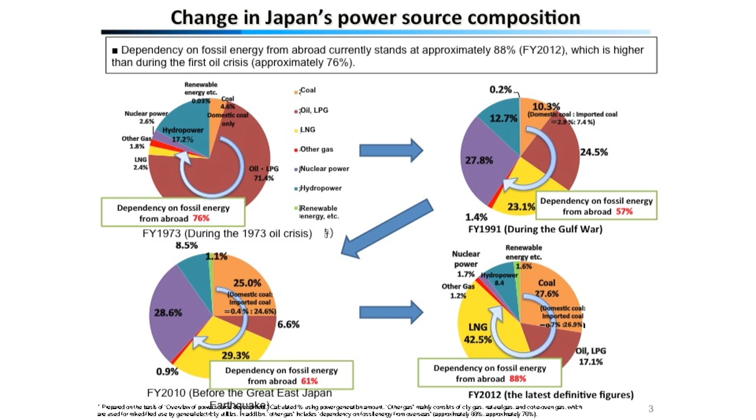We succeeded in reducing the dependency ratio to around 60%. But unfortunately, after the great earthquake, because of the nuclear shutdown, our dependency on overseas fossil fuel for power generation has reached 88%. This number is far worse than the 1973 situation. That's the reality in Japan.

Of course, the self-sufficiency ratio of Japan is very low. Japan's self-sufficiency ratio is the second worst among OECD countries. Do you know which country is worse than Japan's self-sufficiency ratio? Luxembourg. That's the reality.

Japan and other Asian countries are also heavily dependent on Middle East oil. 80% of the oil supplied to Japan's total oil supply has passed in front of the Hormuz Strait, in front of Iran.

Not so many people well understand the procurement structure of natural gas in Japan. The natural gas procurement structure is relatively diversified: Australia, Indonesia, Malaysia, Brunei, Qatar. But still, our dependency on the Middle East for natural gas is around 30%.

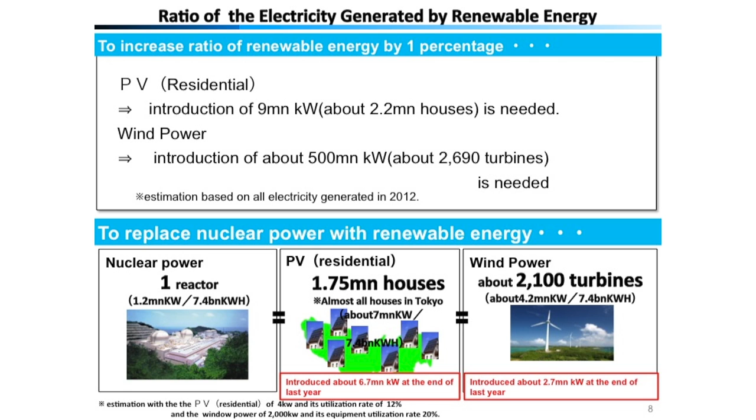To increase the ratio of renewable energy by 1% of total electricity supply in Japan, in the case of wind power, we would have to introduce around 2,700 turbines. That's not realistic if we want to replace nuclear or coal with renewables perfectly. That's a big challenge for us as well. We need renewables, but we have to be realistic.

And next, I would like to share the energy problem from an economic perspective. We had our first trade deficit in 2011 in 3 decades.

Fossil fuel import has rapidly increased. In 2010, fossil fuel import cost was 17.4 trillion yen, but in 2013 we had 27.4 trillion yen to buy fossil fuel.

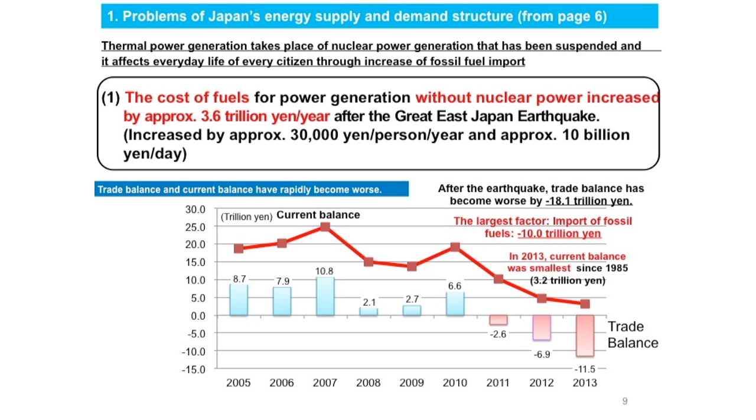And the direct impact from the nuclear shutdown is estimated at around 3.6 trillion yen per year. We have to pay an additional 3.6 trillion yen to stabilize the power supply in Japan. This situation is having a serious influence on Japanese economic growth, of course.

And gradually, such an influence we are receiving now. And the outlook - how do you see the outlook of electricity price in Japan and fossil fuel price in the world?

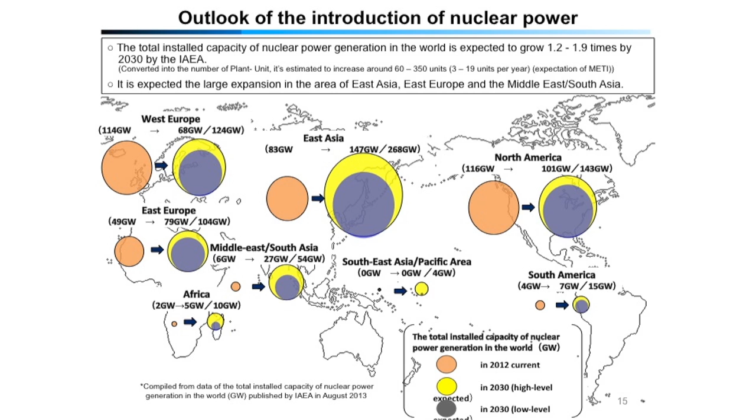But actually, after the great earthquake, we recognized such a plan would not be completed. So we tried to replace the strategic energy plan, but we spent over 3 years to do so. In the introduction of the strategic energy plan, we first mentioned that energy security is always a significant issue for Japan. And this is the first time we introduce a special period from now to 2018 through 2020 to complete various kinds of reform for the energy sector.

Now we are doing an electricity supply system reform, as well as gas supply system reform. We will deregulate. We will make such an energy supply system deregulated to introduce competition and new investment. And the U.S. will start LNG exports to Japan from 2017, and maybe after 2018 we will see a serious number of LNG shipments from the United States.

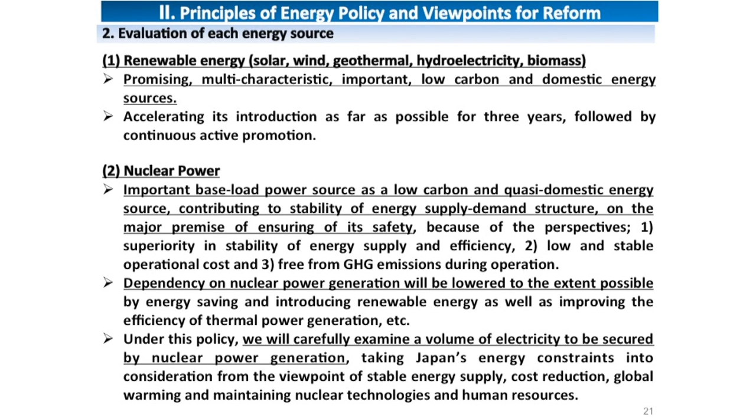Actually, still in Japan, people have strong anxiety about using nuclear. Because of that, public opinion is still divided. But on the other hand, nuclear has various advantages as well: low carbon, cost, domestic energy source, and efficiency because of the small fuel supply needed to operate such a large power plant.

So because of that, firstly, we have to keep safety as the priority for nuclear power plants. But in the case that the Nuclear Regulation Authority confirms the conformity of a nuclear power plant with the regulatory requirements, which are of the most stringent level in the world, we would like to restart such a plant. Of course, we would also like to lower the dependency on nuclear.

Regarding coal, it has a big advantage on cost efficiency. But on the other hand, the big problem is carbon emission. So we would like to reevaluate coal with the most advanced technology to reduce environmental load. Fortunately, Japan has the most advanced technology to reduce this kind of environmental load.

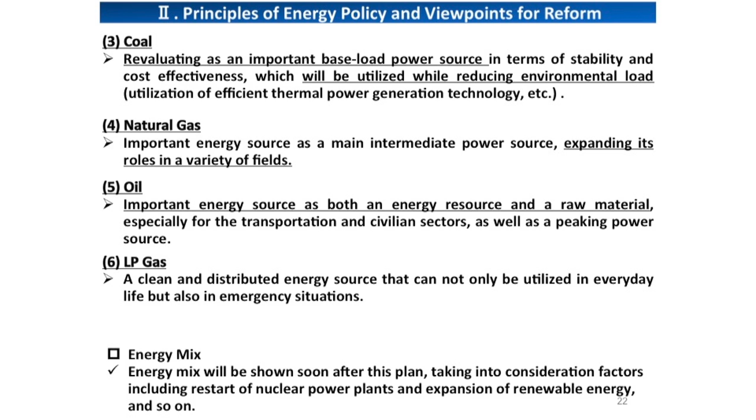And regarding oil, demand in Japan is decreasing around 2% year by year. But on the other hand, in the Great Earthquake, oil and LPG were so important because of portability. These energy sources were the last resort for affected people. The problem is how to keep the oil supply structure in Japan, because the oil industry's capacity is much more than the current oil demand, and the demand is decreasing. So how to keep a healthy supply structure is one of the big questions for us. Because of that, we would like to facilitate industrial restructuring in the oil sector. So these are the directions for each energy source.

And how to manage the procurement of natural resources like that? Firstly, we would like to facilitate diversification of supply sources and support private companies in upstream development in North America and Africa. Also, we would like to improve conditions of the contract in LNG dealing, like destination clauses. And we also want to develop our seabed materials, like methane hydrate. We are making our best effort to diversify the supply sources. We have a big amount of methane hydrate in deep sea water around Japan. We need a long time to develop these sources, but we have big potential.

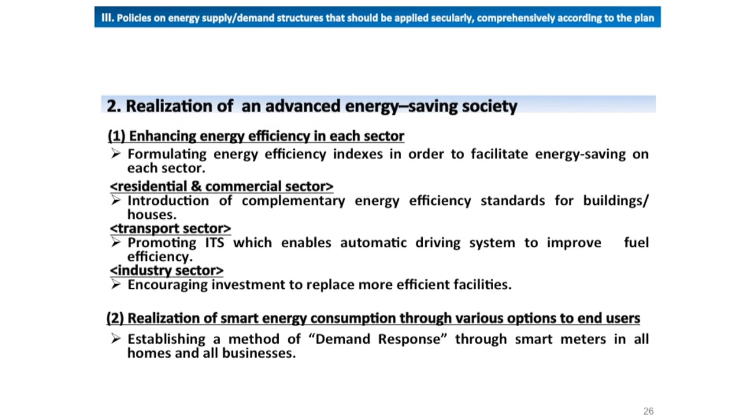And regarding energy savings, Japan is one of the most advanced energy saving countries. We are proud of this situation, but we have to make more effort. We have already introduced various ways for energy saving, regulatory measures and support measures, for all sectors: industrial sector, consumer sector, and transportation sector. And we are seriously thinking to introduce compulsory energy saving standards for houses and some constructions.

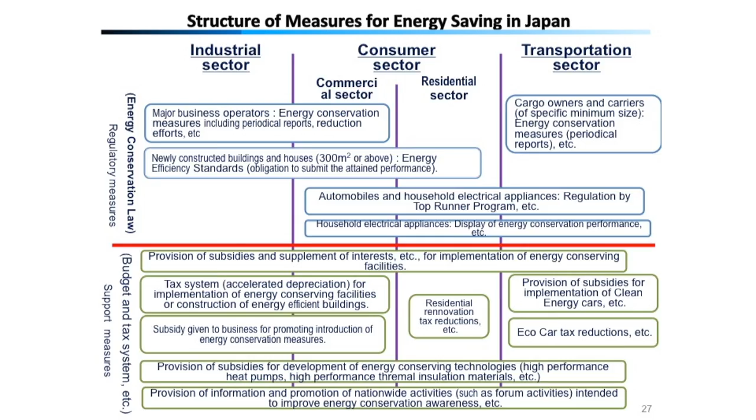And also, to introduce true demand response in Japan, we are planning to introduce smart meters as part of this plan. And regarding renewables, we are very serious about expanding the introduction of renewable energy.

Since 2013, we will accelerate expansion over 3 years, and we also established a ministerial level meeting to coordinate facilitating measures in the government. But on the other hand, we have some problems: cost and instability from renewables. So how to manage this is a big challenge for us.

Firstly, we are shortening the period for environmental assessment for wind and geothermal to accelerate the introduction of these renewables. Also, we promote R&D to reduce the cost for renewables.

But on the other hand, we would like to introduce another kind of approach. This means we also facilitate a distributed energy supply structure in Japan. We have a very centralized power supply structure. But now, after the experience of the Great Earthquake, we should facilitate the introduction of a distributed energy supply system in Japan with renewables and cogeneration based on gas supply.

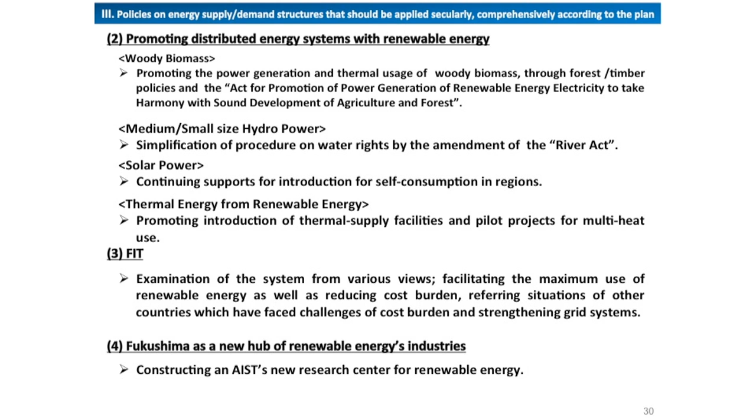And the feed-in tariff system. The feed-in tariff system is a very powerful weapon to expand the introduction of renewables. But we have to keep an eye on the cost as well. We will examine both sides to operate the feed-in tariff system appropriately.

But on the other hand, the feed-in tariff surcharge is also rapidly increasing. In 2012, around 190 billion yen that we have to gather for renewables.

We had 1.6% renewables in 2012. In 2013, we had 2.2% renewables to total power supply. Surcharge reached 350 billion yen, and in 2014, surcharge reached 650 billion yen. The cost is rapidly rising. How to manage this kind of situation is very important for us.

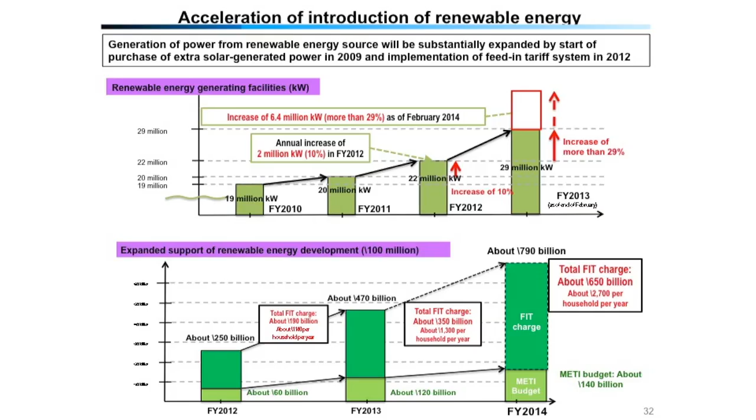Regarding Fukushima, we are accelerating the Fukushima reconstruction through R&D activities like that.

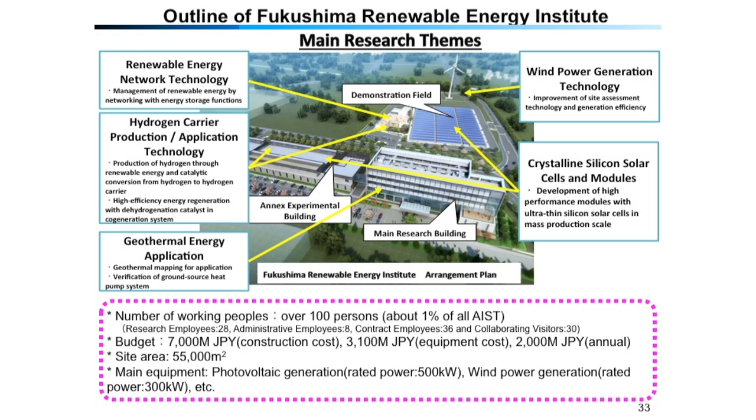In nuclear, as I mentioned, the Nuclear Regulation Authority gave a confirmation about safety. We would like to restart nuclear plants. Of course, we will make more effort to improve our safety operation capability.

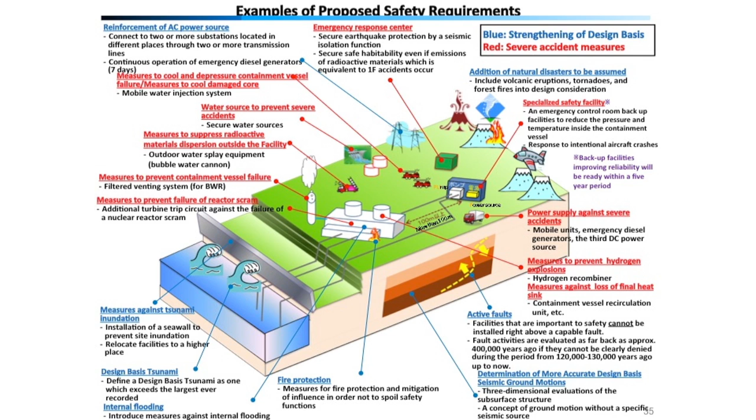We also have to examine the appropriate business circumstances for nuclear power. We introduced this kind of stringent regulatory requirement for nuclear power plants, and now 18 reactors are waiting to receive confirmation about safety from the Nuclear Regulation Authority.

We would also like to touch upon the back-end problem for nuclear power. This part, we spend the biggest portion to explain how to manage the back-end problem of nuclear power plants. Firstly, the Japanese government will play a proactive role to select a final geological disposal place. In 2000, we introduced legislation to select a final disposal place, but that system didn't work. Because of that, the Japanese government will give an offer to places with promising geological conditions to introduce such a final geological disposal facility.

We also would like to introduce reversibility and retrievability for final disposal. It means in the future, the next generation will have special technology to reduce the volume of spent fuel and reduce the toxic level of spent fuel through fast reactors or some accelerator system. Because of that, retrievability is very important for the future generation.

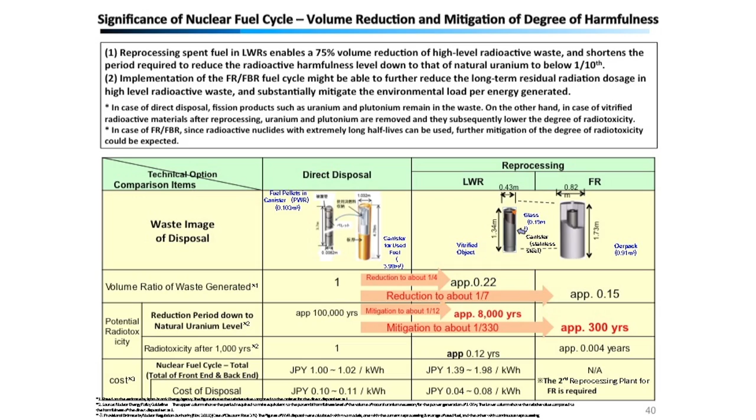In the case of fast reactors, we will be able to reduce the period from 100,000 years to 300 years. But on the other hand, this kind of technology is just at an infant level. We have to make more effort. But we have such potential to reduce the toxic level and volume of spent fuel. We have to keep up such effort, not only in Japan, but also in other countries like France and the US.

This strategy covers various things. We are promoting an effective use of high-efficiency coal thermal plants. We are also giving a strong commitment to complete the reform of the electricity supply structure, the full retail competition, and legally unbundling the transmission sectors. We will also do this kind of reform for the gas supply structure as well.

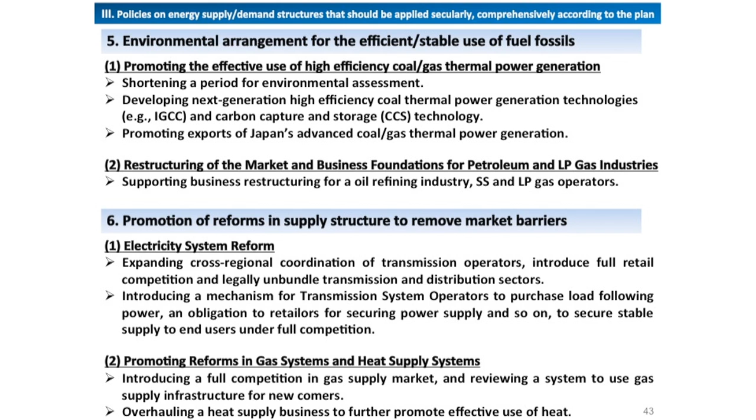If we replace the existing coal thermal plants in the US, China, and India with Japanese advanced coal thermal plants, we would reduce 1.5 billion tons of carbon emissions, which is bigger than Japan's total carbon emissions. Because of that, we are very positive about promoting our export of advanced coal thermal plants to other countries. We believe we will be able to make a big contribution to climate change through these kinds of activities. We are also carrying out the electricity supply reform as well, like this.

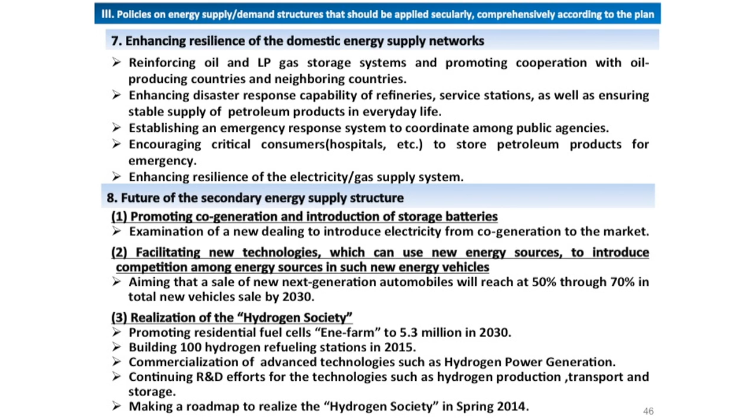We will enhance the resilience of domestic energy supply. We will also introduce a new structure for secondary energy supply. Especially, we are very serious about realizing a hydrogen society. Several Japanese auto companies have plans to start selling commercialized fuel cell vehicles from 2015. Because of that, we would like to introduce 100 hydrogen stations by 2015.

Also, we would like to use reforms of the energy sector as an economic growth engine. And we would like to strengthen international cooperation more and more, especially with the United States. So far, we had some official agreement to cooperate in the renewable area and the nuclear area. But the US eventually decided to start LNG exports to Japan, which means all energy sectors will be able to discuss with American friends.

Also, as I mentioned, Asian energy demand is expanding rapidly. How to manage this situation is a big challenge, not only for Japan but also the United States. We would like to discuss with the United States to manage this. Long-term strategic R&D is also very important, and the most important thing is to keep good communication with the public.

This strategic energy plan covers various areas. There are a lot of challenges, and we need support from the public to complete this direction. We just started to find solutions to energy issues, but we will complete it. Please keep in touch with us, and please give us your advice and your ideas. Thank you very much.